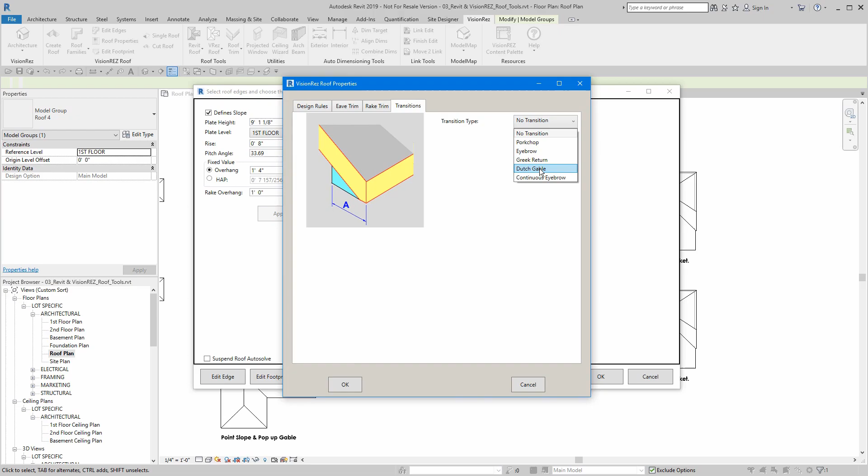The first one we want to do is Dutch gable. 1'6" is going to be the setback, but we can set it to 3 feet if we like. I think that's probably large enough to show you the size and variety of what it's going to do, so let's say OK. You notice that it is set back now, and let's say OK—so there's our Dutch gable.

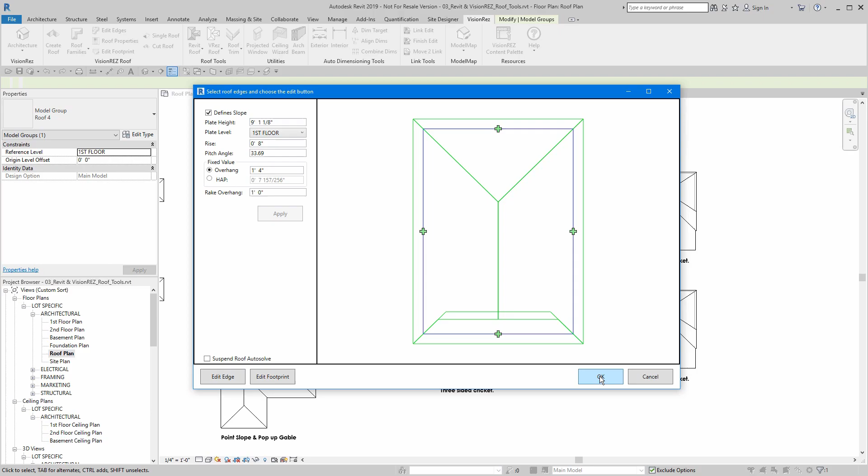So if we were to take a look in 3D, get the correct one, there's our piece. Now see, we're already in 3D. We can work with some of these tools inside here, so let's actually use the same tool we did a while ago, edit edges, and I want to edit this one.

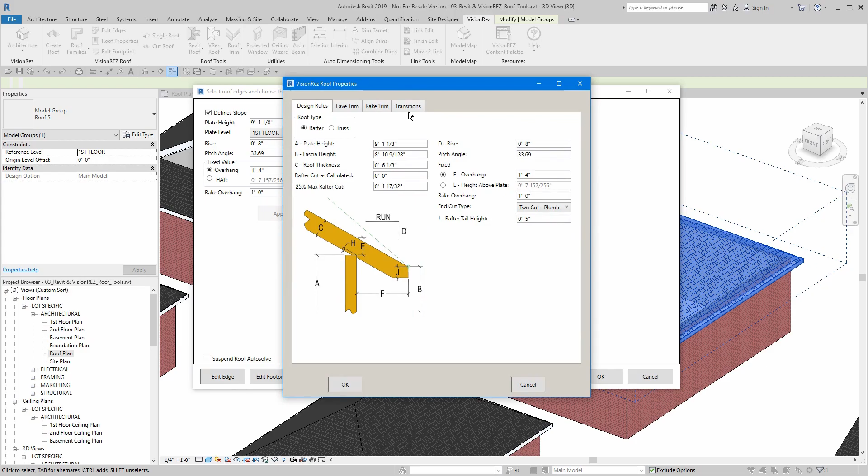I'm going to change this to a continuous eyebrow. So it's just going to adapt to the overhang that's already there. We can change the overhang.

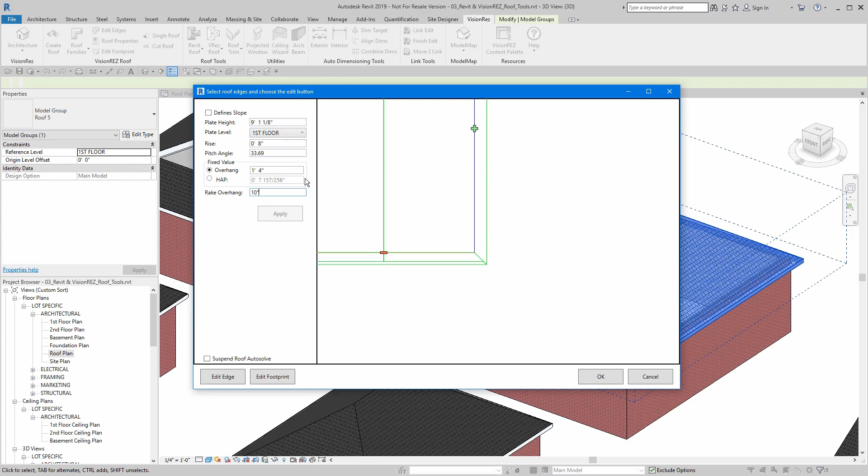So if we get in here, we can pick it. I think we've got it picked. We can now change that overhang to be, let's make it 10 inches, just so it's a little more profound. There we go. So if I say OK, we now have our piece put in there with the trim and everything's good.

Two other ways: we have VisionREZ trim, same thing but it's just a little bit different. It's going to add some walls, and it's going to ask some additional questions.

So let's start off with the Dutch gable like we did a while ago—pick the location that we want to go to. This is a little bit more prescriptive. The only thing is that it will explode your roof on command when you're done using the tool.

So set it back—that was fine at 3 feet. We did 10 inches as our overhang, and we can change this to the closest piece, which is 12. We should have a 10 put in there, but we'll use 12 for now. The exterior finish inside this area is the thing that's different from using this tool versus using the edit edge tool. So I'm going to say OK.

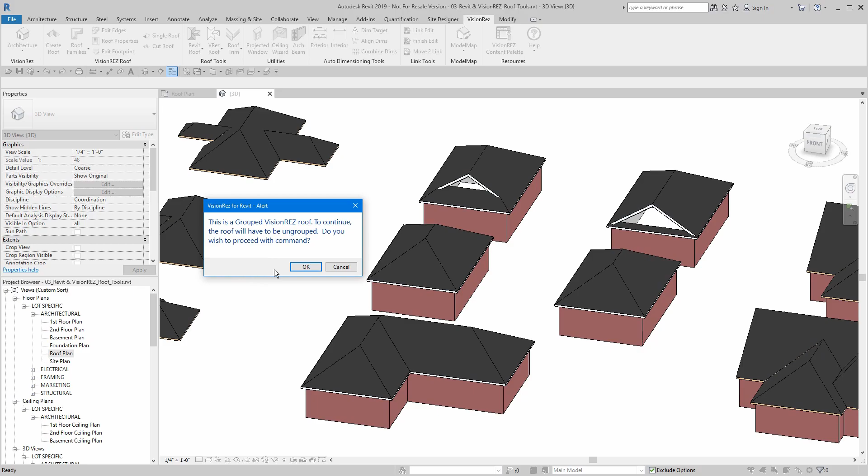It's going to come up with an alert saying you're about to ungroup your VisionREZ roof—are you OK with it, basically? So we're going to say OK.

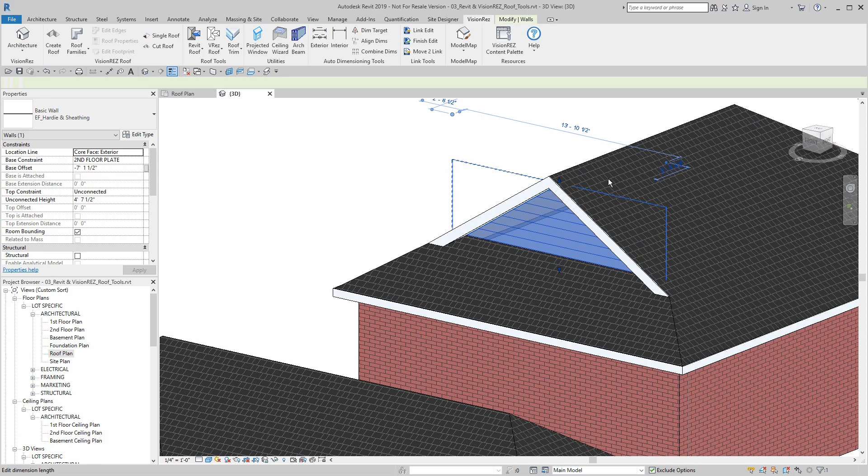So it's done a lot of geometry for us, but now we cannot use our edit edge tools. So if you're at a point that you're finished and you did not want to draw this wall in to where it is and cut it to go underneath the roof, you can use that tool, or you can use the edit edge tool. It's really your preference—one tool came out before the other, but we decided to keep both because different people like to use different tools.

We also have that same tool in continuous eyebrow. So what we're going to do is pick our plane first. We're going to set it up as a balloon frame wall—we could have 2 stacked walls, a wall on top of a wall. Maybe that wall has trusses and just an exterior finish, so you could pick that and scroll down to find the appropriate material. For now, we're just going to use balloon framed.

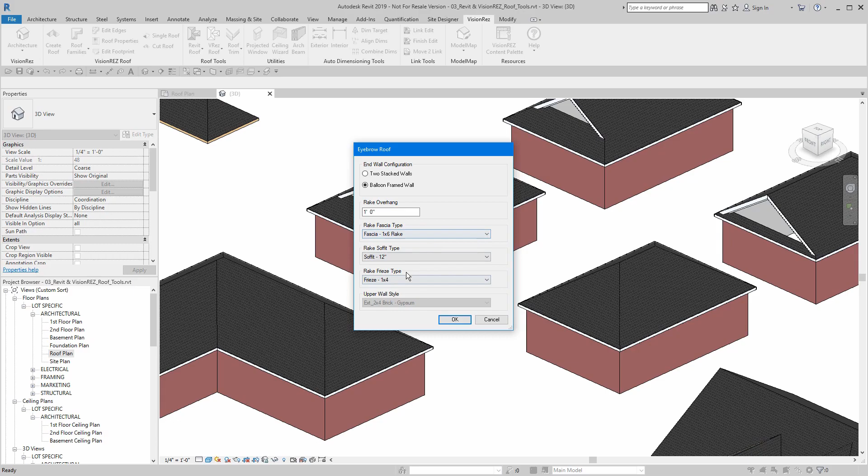We're going to do a 1-foot overhang on this—all the trim's the same. We're just going to say OK now. It's going to tell us the warning that we are going to ungroup our VisionREZ roof—would you like to proceed? Yes, let's do that.

So it's cut in, it's put in a continuous eyebrow, all the trim is cut properly, and we're ready to go. The only difference is, just like the Dutch gable, once you pick a piece, you cannot use the VisionREZ roof tools any longer.